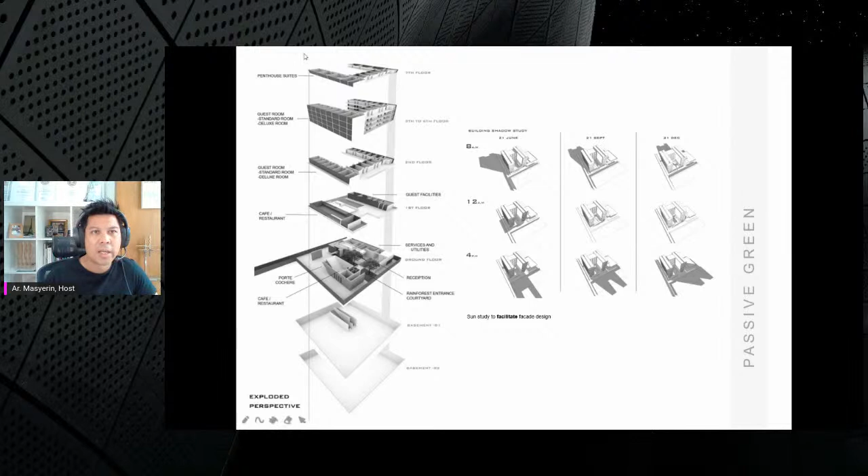From level 2 to level 6, we have the standard rooms, which we call city rooms because they face out into the city. We also have the deluxe rooms, which we call courtyard rooms, as they open into the internal courtyard of the hotel. On the 7th floor we have 5 suites specially designed with artists and influencers. These are the 5 suites, which I'll show you later in my slides, and they are more popular compared to the other rooms, specifically designed with 5 different themes.

So with the studies we had earlier, especially the context study and shadow study, we derived various architectural skin treatments. We look at more opaque walls facing the east and west of the site, and we have vertical fins in front of the rooms, which still allow views out from the rooms while keeping them shaded from direct sun.

On the west especially, we explored quite a number of designs to ensure we bring in enough light and ventilation. So it's a naturally ventilated corridor on the west side, which is where this is. These are some of the studies to ensure we have a good balance of light and ventilation in the space.

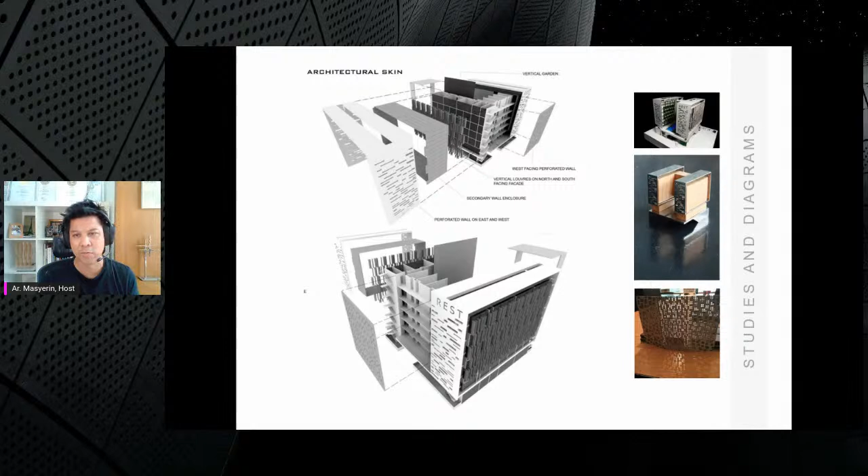So this is the front facade. The facade is actually a simple composition of both order and chaos, which is a reflection of KL city itself. We also have the restaurant perched up above the ground level, about 6 meters high, which was important for us because we wanted presence on the front street of Jalan Bukit Bintang, since we are tucked behind the Shell station. By doing so, we have the restaurant presented to the street.

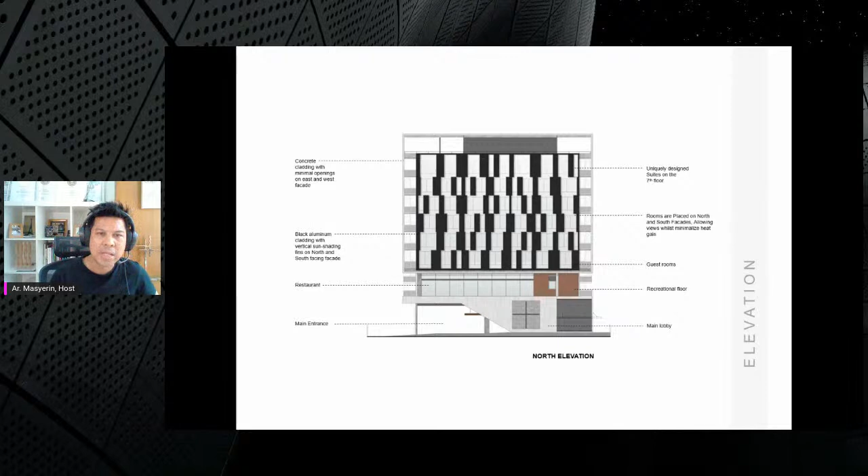On the left and right here, you can see the east wall and the west wall. We actually have a double skin treatment here, where one wall has certain perforations to allow light into the staircase, while the staircase ensures the internal walls where the rooms are kept away from direct sunlight. That in turn reduces and minimizes the use of air conditioning in the building.

Just the front facade, and as I mentioned, the restaurant being lifted out above the floor, and below here is where the porte cochere is, which is the main entrance to the building.

The vertical louvers for the facade facing north and south. This is south facing, which gives us views from the rooms looking into the TRX development and the tower itself.

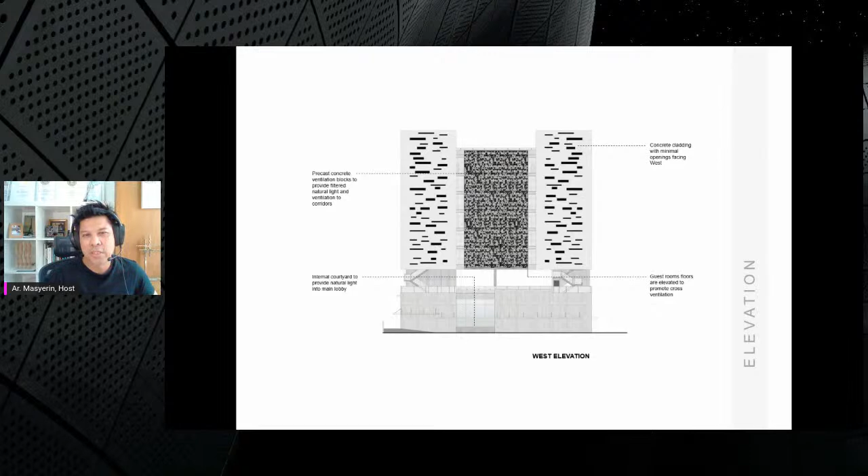Again, the west facade with different levels of opaque and perforation, which we studied in detail to ensure sufficient cross ventilation of air and sufficient light into the interior space. So this is the use of the vent block on the west facade.

To our surprise, the space is very comfortable. We were worried it was going to be dark and stuffy, but it had a good balance of natural light that penetrates and filters through into these naturally ventilated corridors. These are just the conventional ventilation concrete vent blocks that we can find in our market.

The good thing with them is they have a certain depth, and because of that it gave that sort of protection from rain splash into this corridor. We were worried this corridor was going to get wet during the heavy raining season, but apparently it worked quite well.

In the evening, you get this kind of effect with the play of light, and you get the breeze flowing through. The light changes and moves around 4 to 7 o'clock depending on the time of year.

Another important design consideration was to lift the entire guest room block here, to create a gap between the first floor and the second floor, which allowed natural ventilation to take place.

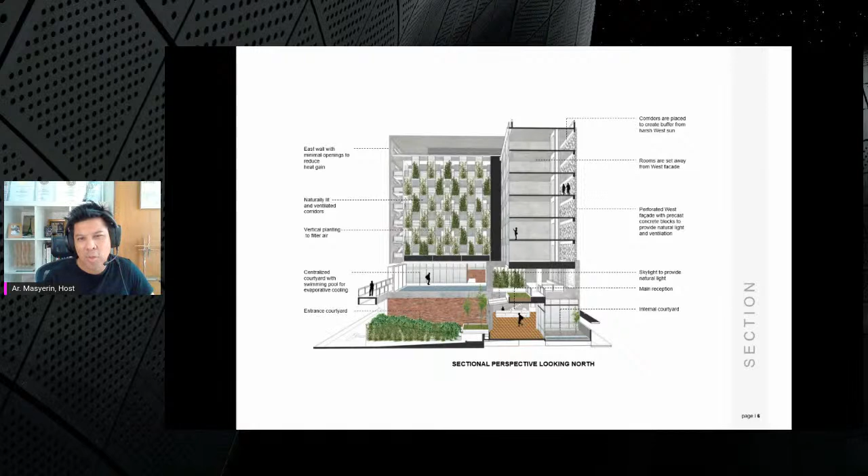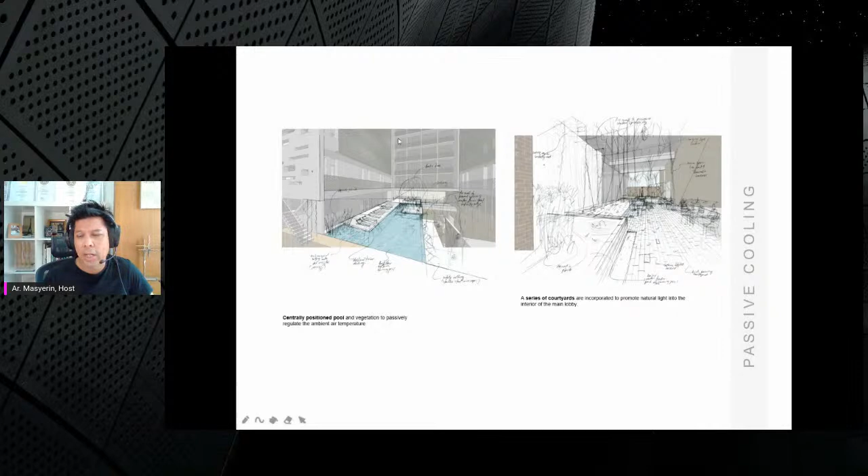This is our early sketches on how the whole vertical landscape was planned, again to have that connectivity between the main entrance, the pool, and all the way up to the 7th floor of the hotel.

This is the internal courtyard. Again, like I said, all the spaces within the building are focused towards this internal courtyard that creates its own sanctuary, away from the hustle and bustle of the city. All the plants also act as a type of filtration against air and noise pollution from the surrounding area.

This is another view from the pool deck, and on the other side we can see the restaurant. Because the restaurant is open to outside guests, and hotel policy wouldn't allow outside guests into the swimming pool deck area, we designed it so they can still have a glimpse and a view towards the swimming pool.

Above that, you can see these corridors, which are all open, naturally ventilated corridors. Another heavy design consideration we had to put in, due to the risk of getting too much sunlight or too much rain splash into the corridor space.

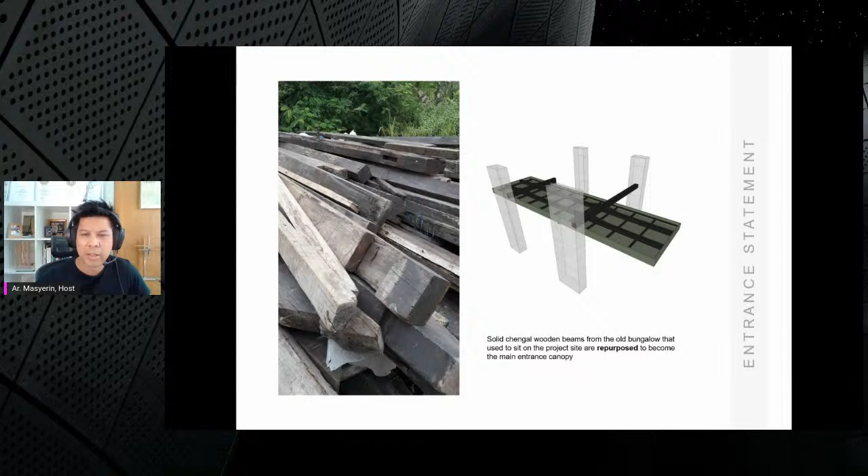But the one thing that really caught my eyes during that time were the wooden beams, because they were really good matured wooden beams or wooden rafters, and they are actually Chengal wood. We took them down, had them sorted, and stored them on a different site. After many years, we brought them to a sawmill and had them cleaned up, spliced, and repurposed into our main entrance statement. So that's what it is now today. We're quite glad with that because it's something that was there on site, and we managed to repurpose it and put it back to where it belongs.

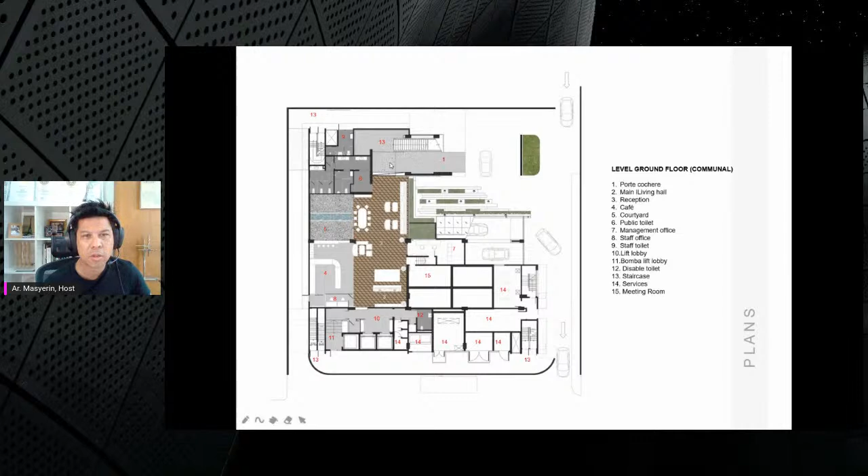So that entrance statement there with that repurposed wooden chengal is here, number one. This is the entrance from Bukit Bintang. There's a sort of donut loop here to where the drop-off is. And from there, as you enter, you split into whether you go up to the restaurant or you enter into the lobby. Now, this is the view as you enter the front door.

Again, as I mentioned earlier, the idea is to really create a simple and humble space that's not intimidating, unlike other city hotels where sometimes you feel that you are out of place. But the design inside here is more domesticated, with a lot of home sort of feel, a timber floor, and a mix and match of furniture, all locally made, locally fabricated.

By our furniture maker. Some that we designed and some are actually mid-century inspired furniture. So from here you can see the reception is tucked away at the back so that anyone can just come in and lounge without feeling intimidated by that usual hotel lobby feel that you have.

Again, this is the front door, and beyond there is the step up to the restaurant at level one. We really wanted to bring in a lot of light, so we had large glazing. We have windows that could open, and on this side here we have a sliding door that you could open on a good day as well.

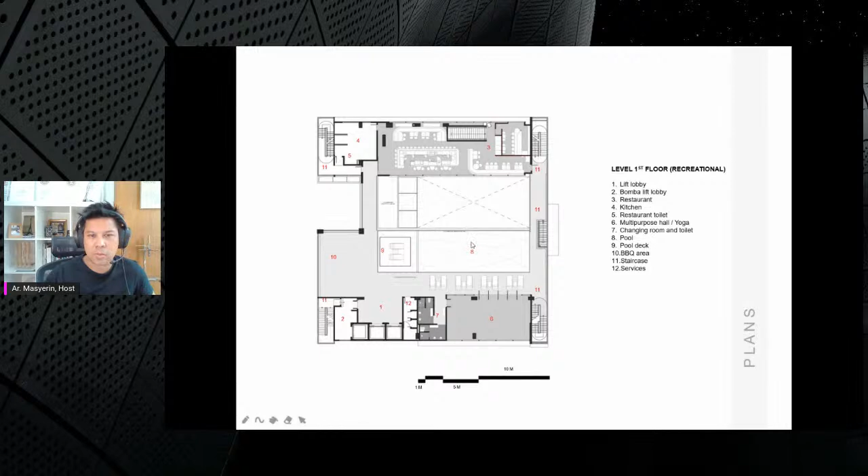Again, the use of materials is kept very natural, to be honest, to reveal what they are naturally. At the end of the pool, there are these three arches that frame the view from the swimming pool. That terminates the view, rather than overlooking into an empty lot, which an empty car park is sitting next to our hotel.

And that is the gap where we designed so that we have that natural breeze, that natural airflow that promotes cross ventilation happening over the pool. And now these are the typical floors.

Back in 2015, when we decided to move away from the city hotel, we looked into redesigning the interior architecture. In fact, the interior architecture was being designed as the project was under construction, partly because as a hotel, you have to stay not with the trend, but in front of the trend. If a project prolongs to be quite long, that's when you have to keep refining and revamping the design in order to be ahead of the trend.

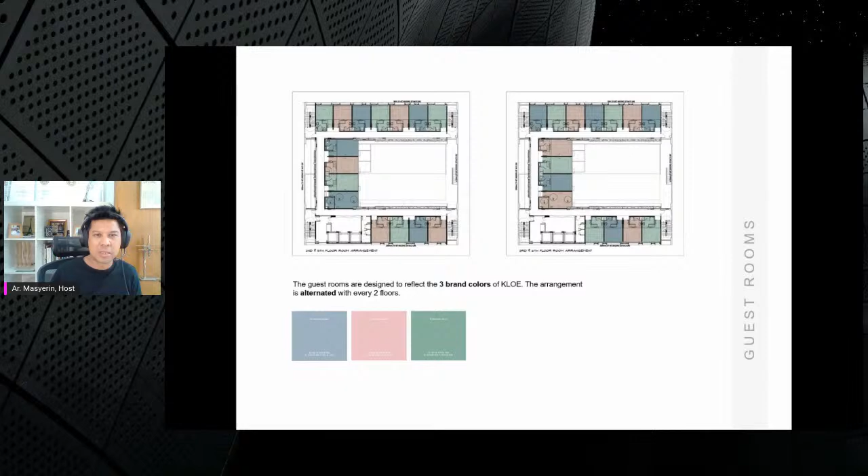So it was only back in 2016 when we started to introduce these three brand colors, working with a collaborating branding agency as well.

It's a softer touch to the whole building, and it gives a good balance to that sort of hard, masculine architecture of the building.

So we started to bring in more refined finishes, at the same time keeping to the idea of honesty in the material.

This is locally designed and made furniture, which we collaborated on with Line Furniture. It's a work desk that we actually have in every one of the standard rooms. So instead of a normal bar that sits underneath the TV on the TV wall, every one of these rooms is given a sort of work desk or writing desk. They are done in solid oak wood.

The lights were specially designed with our collaborator as well, Stephanie Ng. We had them designed, I think, back in 2017.

Most of the materials are kept very simple, very basic. You can see the copper—this is a copper rod. You can see the fabric. You can see the leather loop around that bed head.

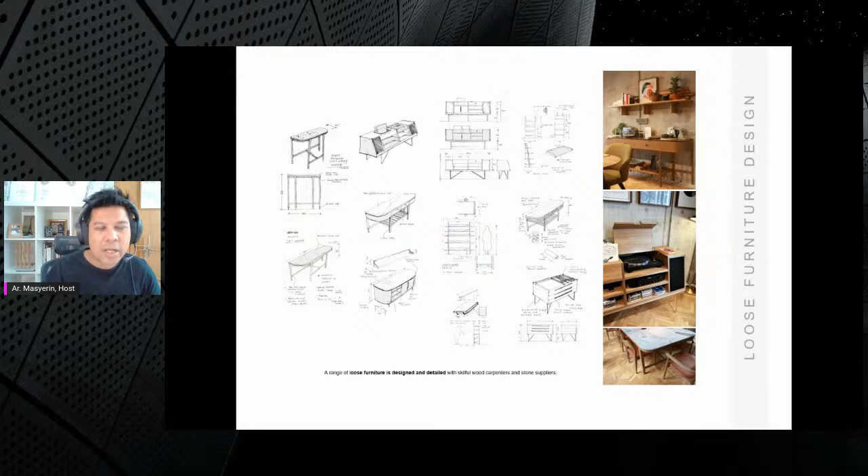These are just some of our earlier sketches of the furniture that we designed for the hotel. It's such a great joy to be able to work with our local artisans, product designers, and some of the specialty contractors on board this project. I guess the success of this project is also due to that good collaboration with many parties, many specialty artisans as well.

And that's the end of my presentation.

Having said that, with collaboration as well, the other set of people we like to collaborate with as architects are product suppliers, which is a very important part in finding our new direction in building technology and architecture as a whole.